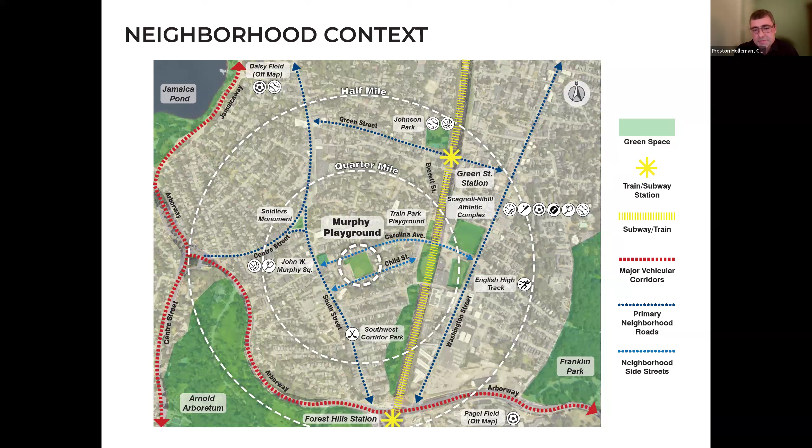The next slide zooms in and we look at some of the different elements surrounding the playground, the major one being the existing school, which uses Murphy Field during gym, and their students also go out there and enjoy lunch, on top of all the permit holders' uses. The site, as most of you know, is between Carolina Ave and Child Street, flanked on the side by Verona Street.

Green spaces within the general vicinity include the South Street Mall with the tennis courts, but beyond that, this is really kind of an important space to the neighborhood.

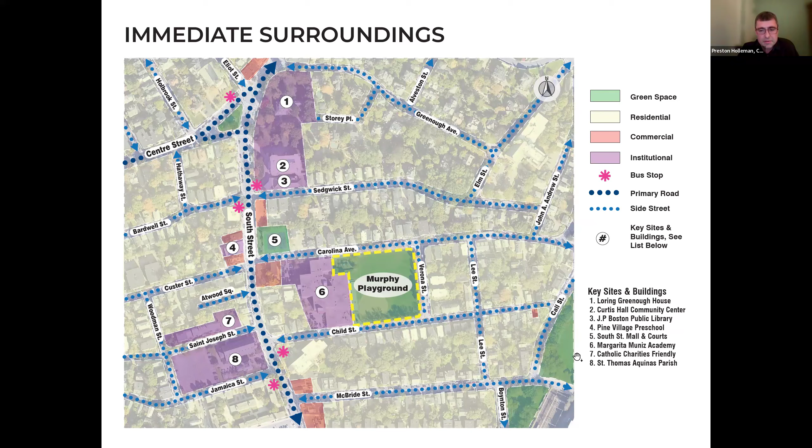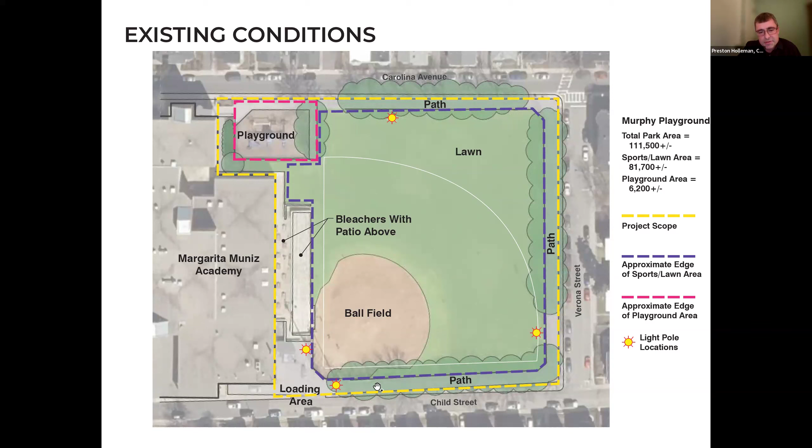Another big element is the existing bleachers along the edge of the ball field, and then there's this dining patio with a direct connection to the school that the students also use during lunch.

Yeah, so I get to take over from here. DJ Chagnon, I'm principal in charge at CBA. Looking at the sports fields particularly, which are obviously the heart and soul of this space and really important, we've got a lot of permit holders, a lot of stakeholders.

The biggest uses being Little League and youth baseball between Regan Summer Baseball, Muddy River, and EHS sometimes practices here, English High. There's also softball—Hub Sports has an adult softball league, in addition to English doing some softball practice here. Soccer between the Soccer Shots program and JP Youth Soccer are also big users of the field.

Particularly over the summertime and spring for soccer, and then Boston Ultimate Disc Alliance, the Ultimate Frisbee folks, for ages 8 to 18, are out there most Sundays throughout the spring and summer into October.

There's a lot of really heavy use on this field. It's used 6 to 8 p.m. most weekdays, Saturdays and Sundays. Between all the various permit holders, as everybody knows, the field is constantly in use.

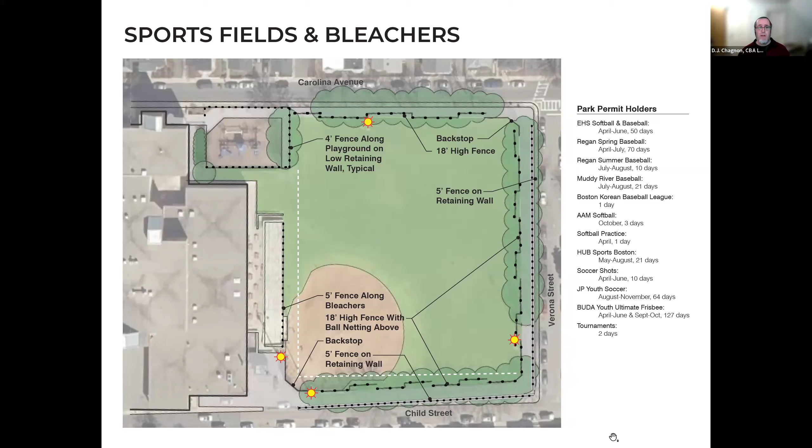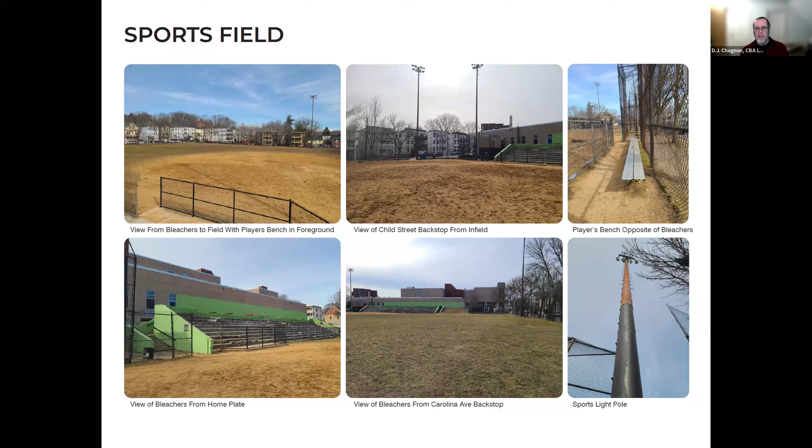The existing concrete bleachers are in some pretty significant disrepair, and there are some clear accessibility issues with them, which we'll get into in a moment. But fortunately, most of it seems to be surface damage, so we think we can make a little budget go a long way addressing the bleachers to refresh them, stabilize them - basically preventive and deferred maintenance without having to do a wholesale redo, so we can really focus on the important stuff: getting the field up to snuff.

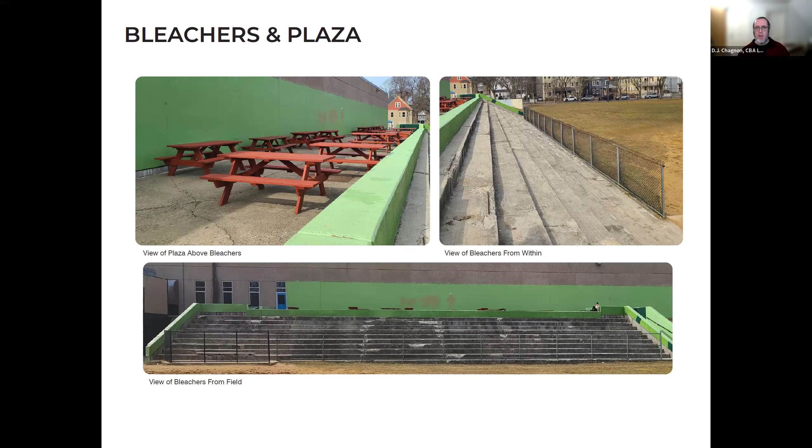As I mentioned, accessibility and ADA compliance - which Nellie brought up - is one of the priorities Boston Parks has. Right now, the perimeter pathway around is almost all not accessible for various reasons we'll get into. The stairway up from the corner of Verona Street doesn't meet current regulations in a few ways. The bleachers don't have any accessible stairs. The playground, because of its surfacing, is not accessible. Most of the park entrances aren't either, so there's some work needed to bring the site into ADA compliance.

Another interesting feature is that there is an accessible way to the lunch terrace, the plaza at the top of the bleachers, from the school, but it requires going very much the long way around. Under that picture at the upper left, there's a connection that gets you to the front doors of the school, but you have to have gotten to those and out and around - it meets accessibility barely, but not well. The loading dock area at the bottom left also has some accessibility challenges from the sidewalk.

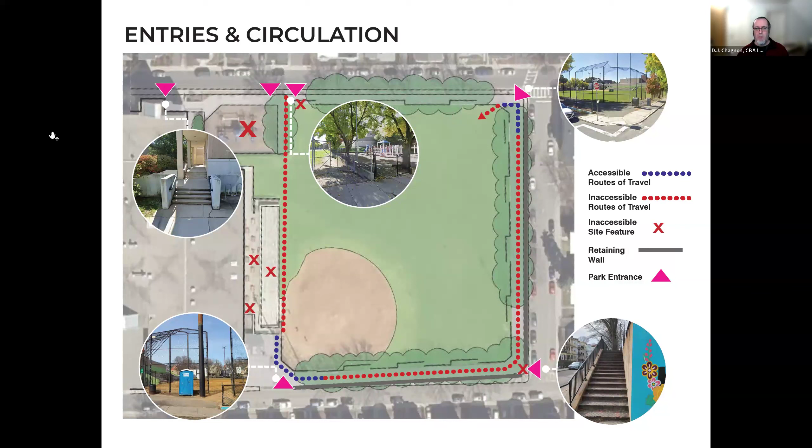Some of these images show that access to the fields at various corners tends to be hit or miss in terms of accessibility. There's no reliable circulation around at all. Looking up the stairs from Verona and Child Street at the Carolina Street gates, the brick is in pretty poor shape, and there aren't proper handrails. The slope up from Child Street, at what's probably the primary access most people would use for the ball field, is steeper than it ought to be, and it's a tight spot where you feel like you're coming into the back of everything.

Around the path, it's heaved by tree roots, with furniture blocking sections of it. The edges of the tree wells have been heaved up, creating trip hazards. There are steps at the entrance to the bleachers, so you can't even pull a wheelchair in - if someone's in a wheelchair and wants to spectate the game, they can't easily get to the bleacher seating to sit with anyone else. So we want to address all of these circulation and accessibility issues, but in a way that preserves the existing trees as much as possible.

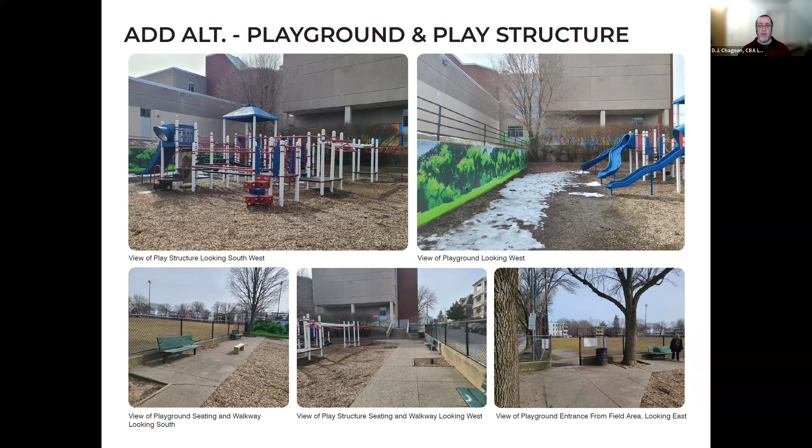Okay, next slide. There we go. So on to those proposed improvements. We'll take a little bit of this and then I'll pass it back to Preston for some of the details.

In terms of the sports fields, we want to rebuild the infield a little bit further out, get it a better distance from the backstop, and straighten out the backstop's lines so that the spectator seating is out of the way. Set up new light locations, six of them instead of just four, that are brand new LED sports light poles, and we'll get to the technical bits of that in a bit.

And then upgrade the field wholesale to improve the conditions and also to address any particular problem areas. We want to protect and improve the field areas that are in good to fair shape already, and anywhere that is having particular problems, we also want to do targeted additional improvements. The plan is to aerate and slit seed, overseed the entire field to get it refreshed, renewed, give it a really good solid foundation to work on. And then anywhere that seems to need soil amendments or additional attention or leveling, we will tackle.

In addition to those, we're creating a perimeter path to connect from Carolina down along the bleachers and behind the new backstop, so that there's an entrance that feels a little separate from the loading dock, and you don't feel like you're coming into a utility area, you feel like you're arriving at the ball field.

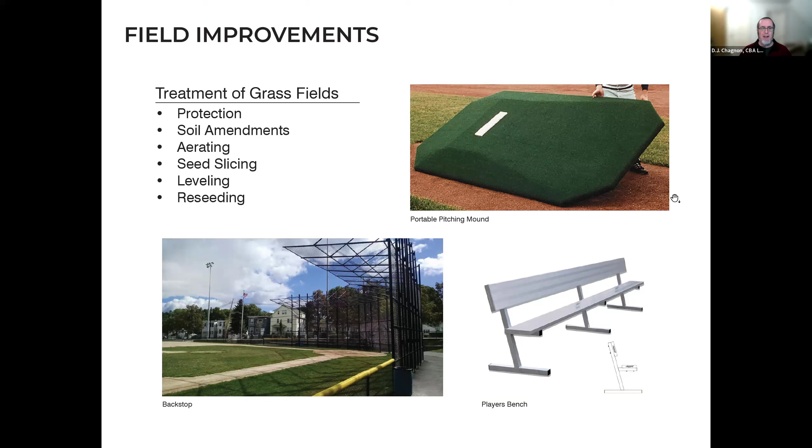Next slide. In terms of the sports field lighting, we're working with a basis of design manufacturer to get really good quality of light on the fields, and just on the fields. That's one of the benefits of the new LED lighting packages. We gave them directives on what light levels the infield and outfield should meet in terms of foot candles, to meet typical regulation play standards. So you have a 50-foot candle average in the infield, a 30-foot candle average in the outfield, which is also enough for soccer field use. And it ends up working out pretty well with 6 new light pole locations.

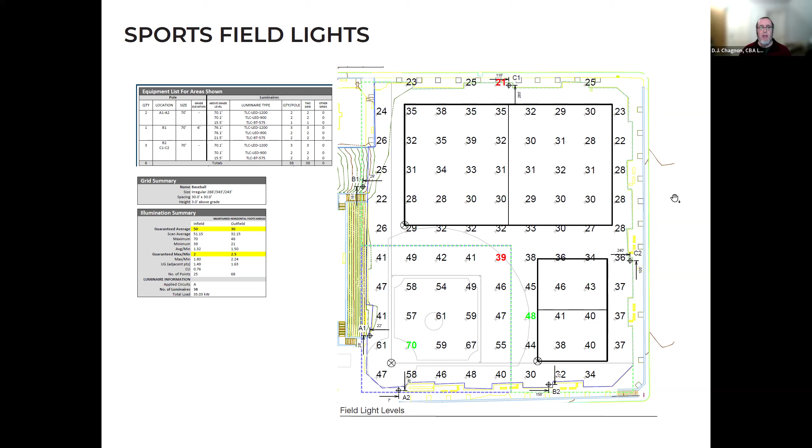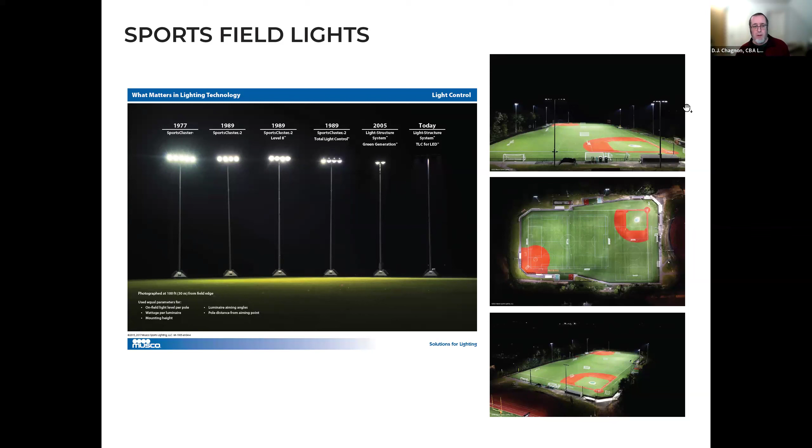If you flip to the next slide, Preston, I know there was some concern about the glare off the existing lights and how the trees are really all that serves to mitigate that. That's because those existing lights are old. The technology has come a long way, and this is a great comparison slide of different products from the same manufacturer over the years, going from the old, very glary lights. They're all aimed at the field, all the same distance away, and the modern lights are still putting plenty of light on the field with almost no uplight, almost no glare, and it really gets the field lit and not much else. You can sort of see that in the images to the right that aren't photoshopped, to the best of my knowledge. They're not our images originally, but the light cutoff is incredibly strong at the edges of the field area, so that it really, really essentially cuts way down on the light spill into neighboring properties. The field will still be well lit up, but the effect on the residents should be much, much smaller than it was. Next slide.

I think this is where we'll let you take over some of the ADA details and such. Yes, so this goes into a little more detail about the improvements we're making to the bleachers to improve accessibility, in addition to what DJ had mentioned earlier about repairing the concrete out there.

First, we've provided a pathway with enough width and a connection to Carolina Ave and the Child Street entrance. What you see here is cutouts that will be made into the existing bleachers, and they function as wheelchair seating spaces. I believe we're required to have 7, but we're putting in 8.

And then there has to be a certain amount of passing distance in front. So the player's bench is now pushed forward a little, but there isn't conflict with the field because the field location was also adjusted with the backstop.

Currently there are no stairs to the bleachers. We just kind of go up into the dining plaza, so the school's plaza. So one of the things we are looking at is cutting in 3 stairways that will allow people to actually reach the different rows of seating instead of having to climb up over the large step seats right now.

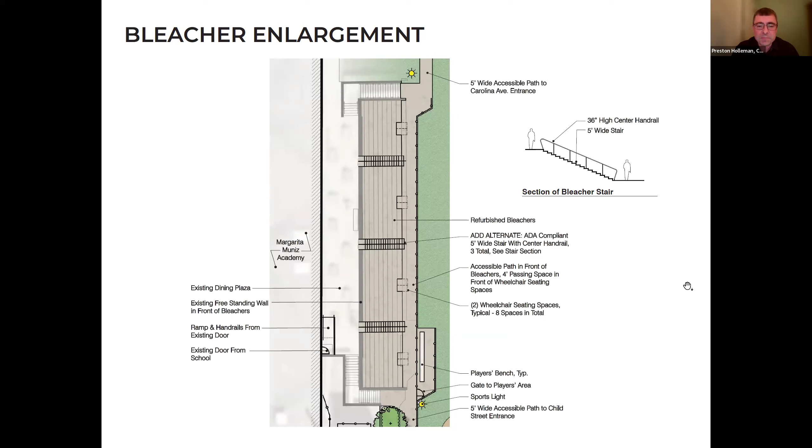This next slide looks into the material we would put on the path outside of the fencing - it's a flexible pavement. As you saw from the existing condition photos earlier, tree roots have heaved a lot of the pavement. This material is designed to work with existing trees and provide a smooth, accessible surface while also minimizing impact to the tree roots during installation.

You can see here that this photo shows the material itself is permeable, allowing water to go down to the roots of the trees. The installation involves some base material that works around the roots and lessens the impact to those existing trees to help preserve them, because that really is something important.

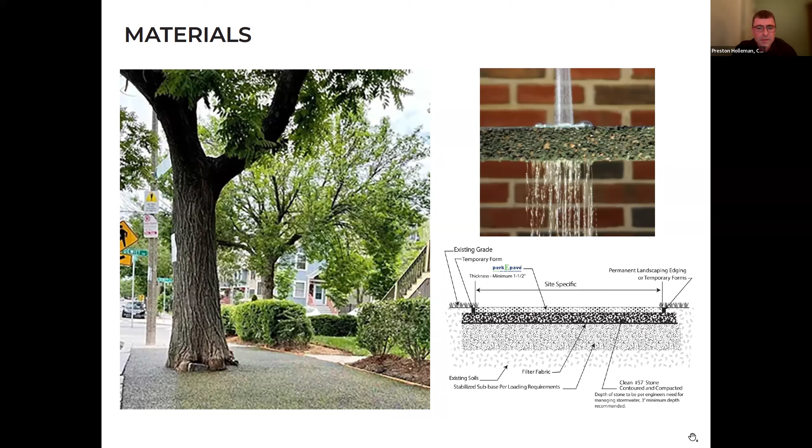This looks at some of the site furniture we're proposing. A larger table - actually, the table we're proposing would not have a seat in one location, to allow a wheelchair to also sit at the table, so it's inclusive. We have the larger tables, and we also have some areas with smaller tables. Then there are waste receptacles and benches in some locations - the benches will have backs. In other locations, the benches will be backless, allowing people to sit facing either direction depending on what they're doing, whether they're watching sports or talking with friends.

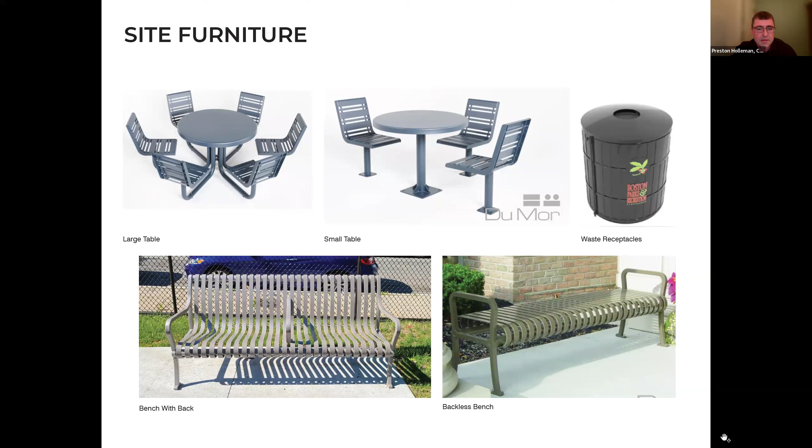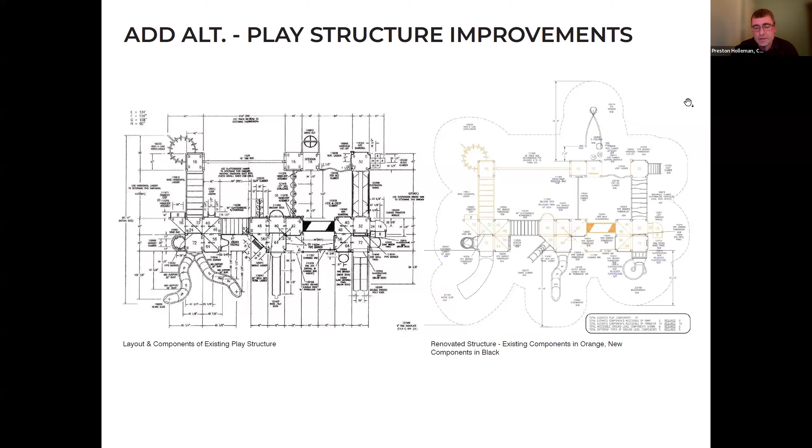So we're adding new slides, monkey bars, spinners, and again, this is all to bring the structure into compliance with current regulations, as well as to generally improve it.

This next slide is basically a comparison between the existing structure and the proposed one. The details are fairly subtle, but you can see how we're adding different slides. There's a climbing component here that isn't over there. You can see we're replacing this stepping component with a ladder, and we're adding a spinner - just general improvements to the play equipment.

Can you roll back to that one for a second? As the office's certified playground safety inspector, things like on that existing double slide in the foreground - it goes right off the deck, and current code requires a longer entry area that steps in, but then there's less space for the slides, so we end up recommending switching to a curvy slide instead, for instance. Also, it just refreshes the playground, makes it a little new for the kids who have played with it for ages.

Other things, like the overhead wheel spinner in the bottom right, are too close to the existing deck for current safety codes, so we replace it with one that's further out, and so forth. But again, that's all it would be great to do.

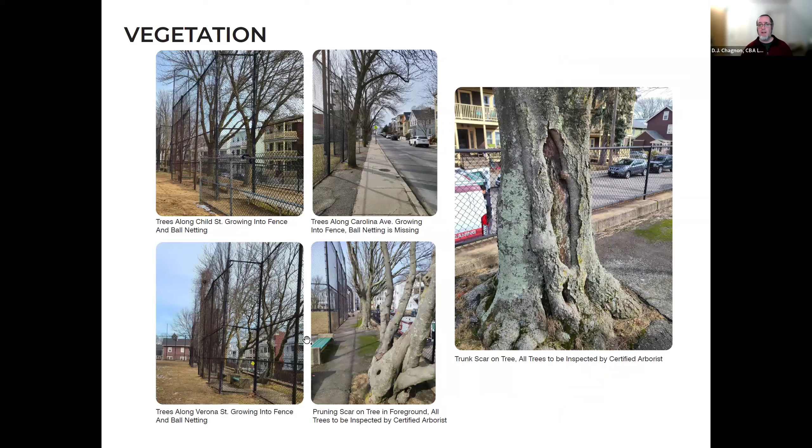That's one of the benefits of the permeable, flexible paving: with that mow strip under the fence line to help keep weeds from growing there, it gives us some ability to play with the height of the pavement so we can go up above, meaning we don't have to excavate down into where the roots are to install the permeable paving correctly. We basically have to, as carefully as possible, lift the asphalt off the top with minimal disruption to the roots below, then lay just enough gravel to even things off and put the flexible pavement on top so we get a smooth surface without disrupting the existing roots.

Thank you very much. And I'll report that to the others in my building, and they'll be very happy to hear it, as will my other neighbors on the street who've been very concerned. I appreciate your concern, because tree health is definitely pretty darn important. Those are significant trees. Thank you.

I'll just hop in on that too. One of the reasons we're suggesting the flexi pave, or pervious paving, is because it was a suggestion from Max Ford Diamond, the city arborist, to help improve the conditions the trees are in so they're less stressed. While there is of course stress imposed during construction, I've been talking with Max and other project managers about how to control the specifications and construction process to reduce that burden on the trees, and replace it with conditions that will allow them to thrive and hopefully increase their lifespan.

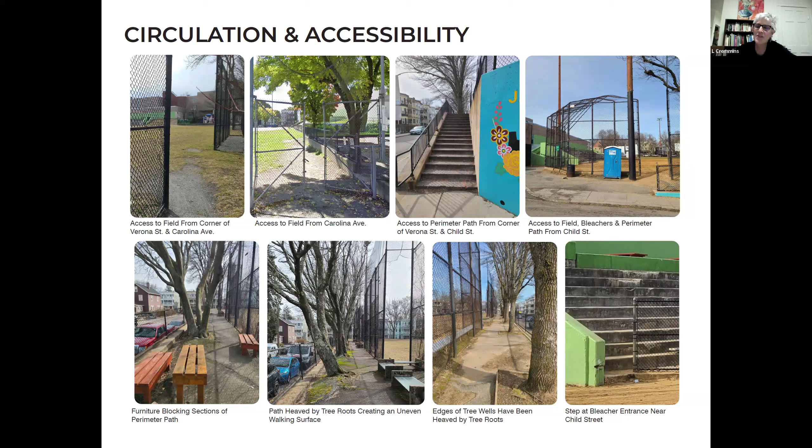Okay, last but not least, new user again. Hello, sorry about that. My name is Joel Thompson. I'm the head coach for Boston's youth program, the Boston Ultimate Disc Alliance.

So I coach Ultimate Frisbee, and we're the new kids on the block, but we started at Murphy in 2021 with 8 kids, and now we're approaching 80 citywide in various fields. People have grown really attached to Murphy. I want to thank the folks from soccer, from baseball, from the Muniz, and especially Parks and Rec for communicating with us and allowing us to come in and offer some input and collaborate with you on this.

In Ultimate Frisbee, we're very used to coming in when it works, knowing that there's a lot of other use for these spaces that's long existed before we came around. That's something we're really sensitive to. I appreciate the work we've been able to do with the other groups who use the field to make sure we're not stepping on toes.

Nice thing about us is we don't have any equipment. We come, we leave, and hopefully don't leave a trace if we can help it. And I appreciate Parks and Rec asking us what we are interested in with Murphy. I don't want to belabor any points that have already been made.

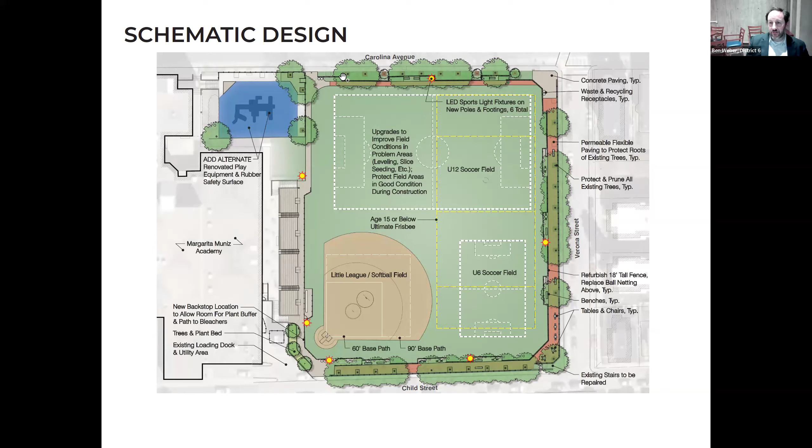I'd like to put a bookend on this for you, having asked the first question, hopefully the last. I would recommend we have an on-site visit so people could go over the issues on the field. It sounds like this is a great start to this process, and I think you've heard from the stakeholders in this—between Joel Thompson and Alf and Bridget and Dan and Brad Mahoney, neighbors on Carolina. I think you've heard from a lot of people who care a lot about this site, and it seems like you've really put together something that a lot of people can get behind.